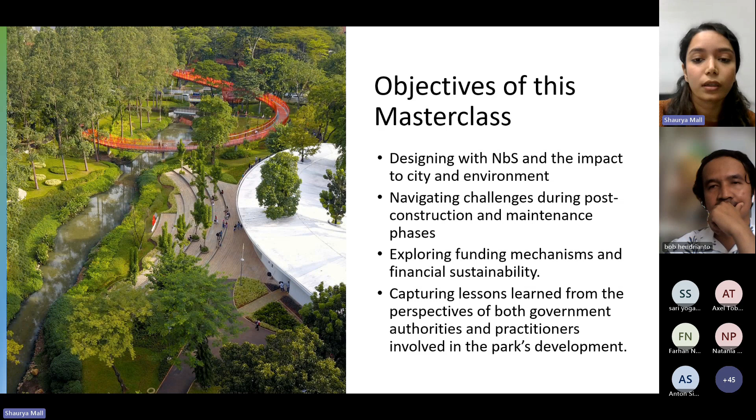Our speakers today will be sharing lessons learned from the perspectives of both the government authority and through the lens of the practitioner involved in the first hand implementation of the project.

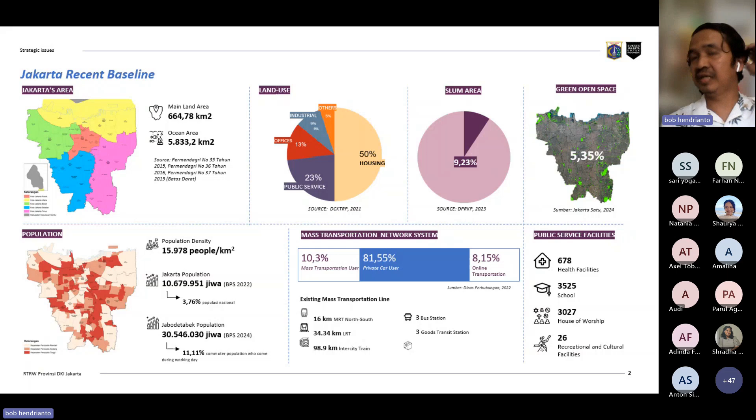Sadly, Jakarta still has a slum area, the number is 9.23%. Green open space is still a small number at 5.35%, which is still far below the requirement, because every city in Jakarta is required to have 30% green open space, compared with Seoul which already has 28%.

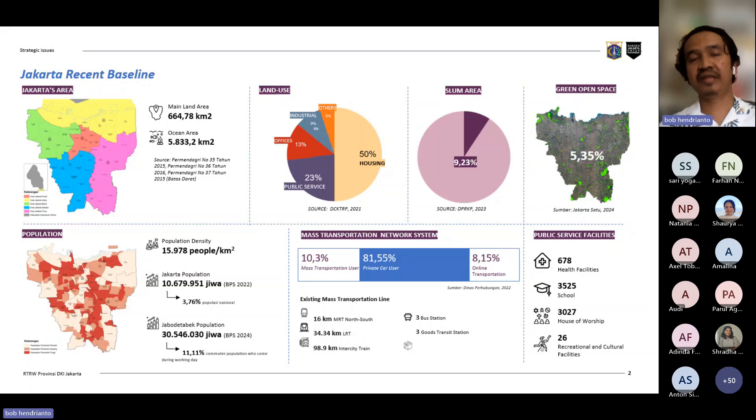Mass transportation user numbers are still small, at 10.3%, because mostly Jakarta citizens still use private cars, at 81.55%. The mass transportation lines consist of MRT, LRT, and BRT, but Jakarta is in progress to develop these lines. Clean water pipe coverage is 65% of Jakarta area, the rest of the area uses groundwater.

We also have annual flooding issues, with 200 to 300 neighborhood units affected by flood per year. Almost half of Jakarta is below sea level, because of firstly, globally rising sea level, and secondly, land subsidence. Land subsidence is caused by, first, active tectonic process, and secondly, over exploitation of groundwater. And Jakarta has poor air quality. These are our problems now.

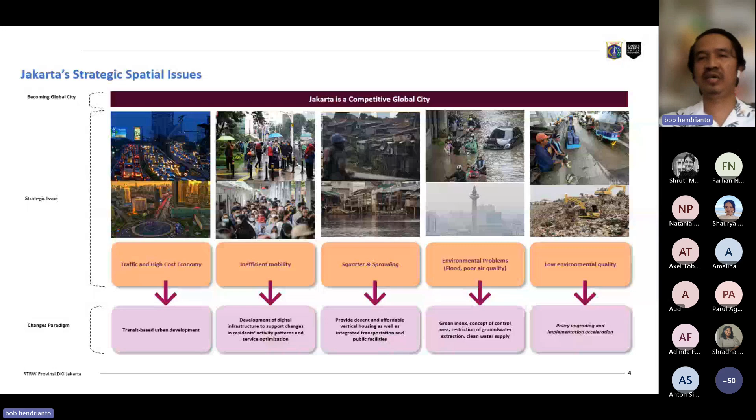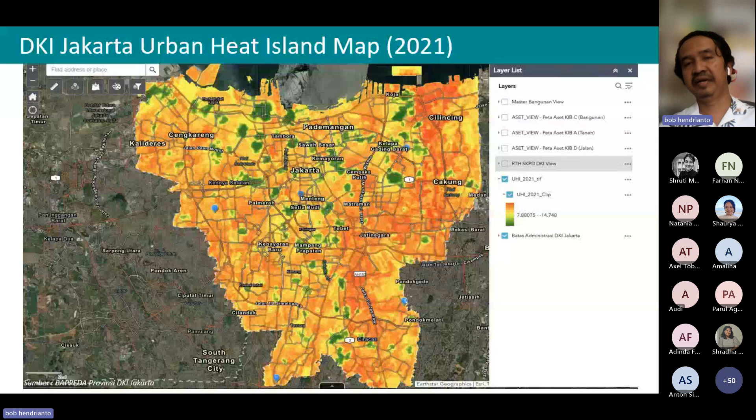Jakarta is a global city, but we have some strategic issues: traffic and high cost economy, inefficient mobility, squatter and sprawling, environmental problems, and low environmental quality. The urban heat island map shows yellow to orange colors covering our province. Globally, temperature has increased 0.9 degrees Celsius in the past 100 years, but Jakarta has already increased 1 degree Celsius.

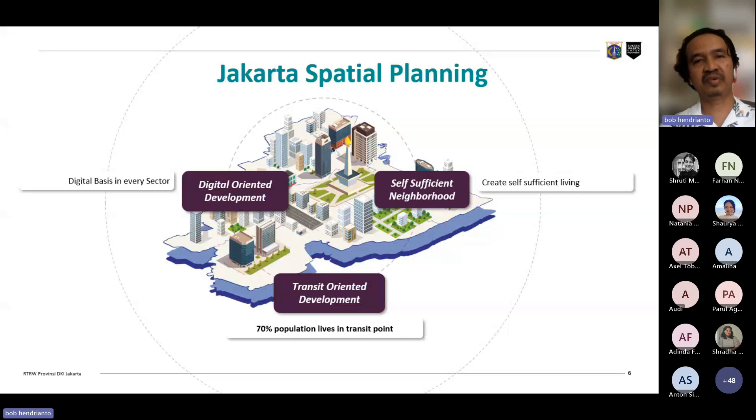This is our problematic issue, so we are taking action to reform our city planning. Now we focus on digital oriented development, self-sufficient neighborhood, and transit-oriented development. We have a target in 2045: 70% of population lives in a transit point. Our government mission is to regenerate a resilient and sustainable city.

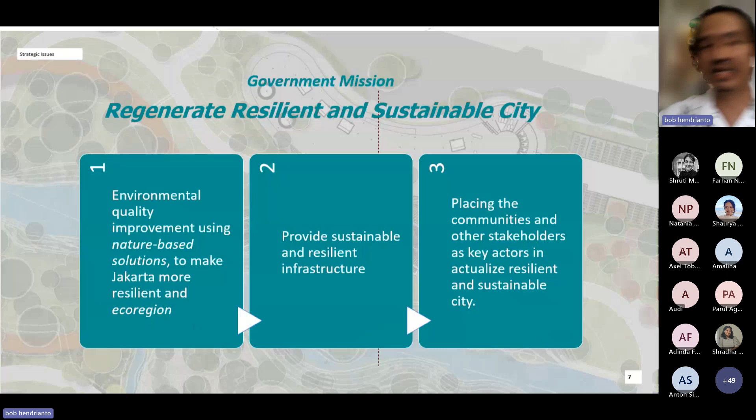There are some important things. First, environmental quality improvement using nature-based solutions, as our topic today, provides sustainable and resilient infrastructure, and places communities and other stakeholders as collaborators, not dominators, as key actors. Then infrastructure development through collaboration between government and private sector as creative financing to build public infrastructure assets.

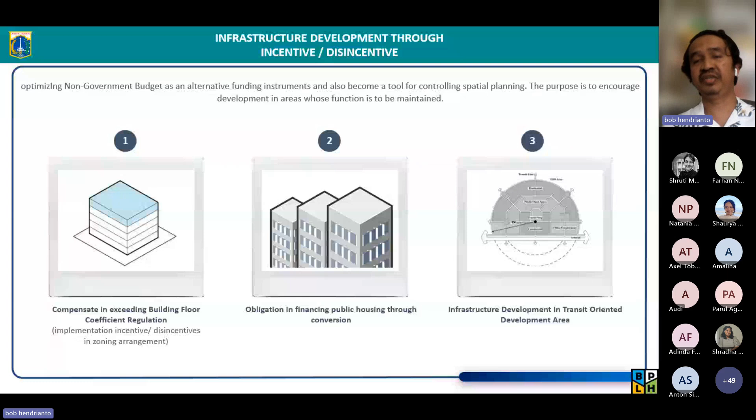We have some alternative funding. One of them is the incentive and disincentive scheme. First, compensation in exceeding building floor coefficient regulation. Secondly, obligation in financing public housing through conversion. And lastly, infrastructure development in TOD, transit-oriented development.

This is a simulation. One option is compensation from exceeding floor level. We made a policy about the legal basis, and then the simulation. For example, from 5 stories, it can increase to 8 stories. The gap from exceeding floor level, we compensate as public infrastructure asset.

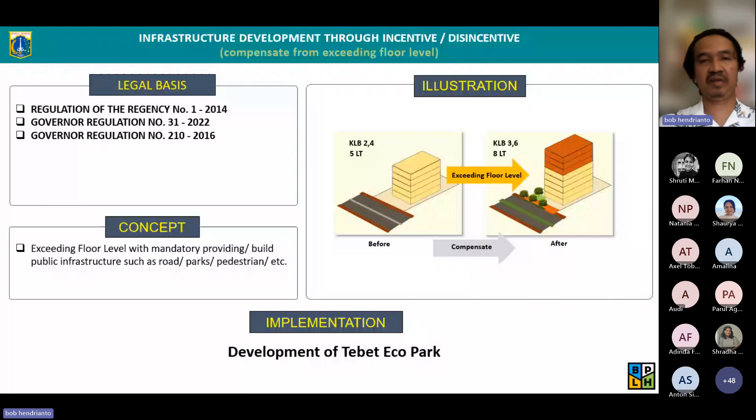We did it at Tebet Eco Park already. Tebet Eco Park - what did government want? Tebet Park revitalization has some key indicators. First, natural river environment and environmental improvement, inclusive visitor access, connectivity between North and South Park because this side was divided by road, and then community activation.

The Eco Park concept is connecting. We have a vision of connecting people with nature. The focus is on nature-based solutions. And then Bishan Park serves as a benchmark for the Eco Park.

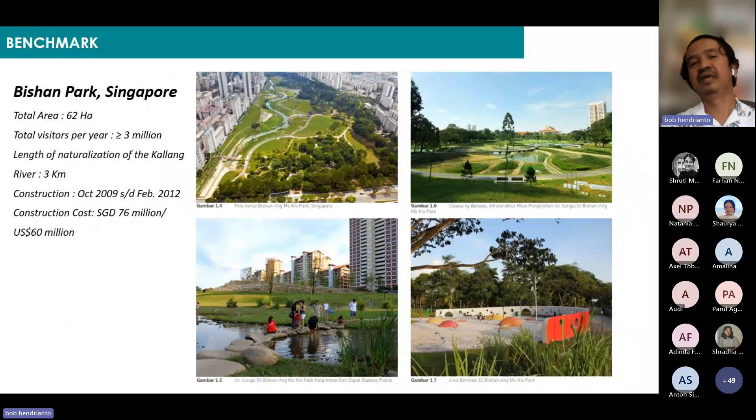I still remember when I communicated with Anton to invite our leaders and our agency to visit some strategic projects in Singapore. Anton guided our leaders and agency to visit Bishan Park, Jurong Park, and so on - strategic projects in Singapore very close in context to Tebet Eco Park.

For mechanisms, Tebet Eco Park used 2 schemes. First, conversion of obligation in public housing scheme - the private companies were PT Award Global Infinity and PT Perkasa Internusa Mandiri. Secondly, compensation in exceeding building floor coefficient regulation - this is the name of that company.

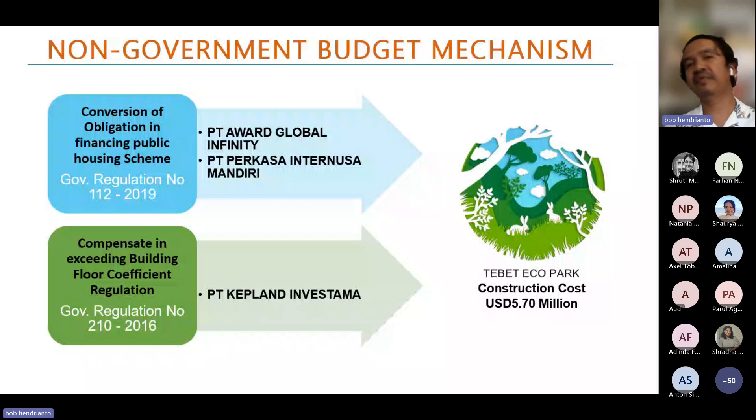Construction cost was about $5.7 million US. Construction time was very short because we just had 7 months for planning and then starting construction. This project took 1 year for completion, and then opened to the public in April 2022.

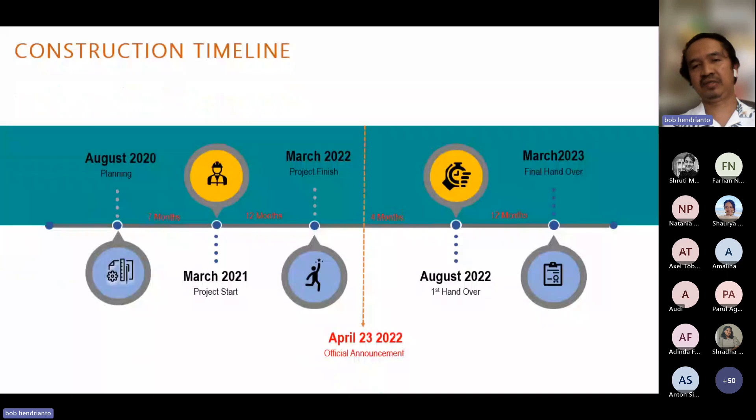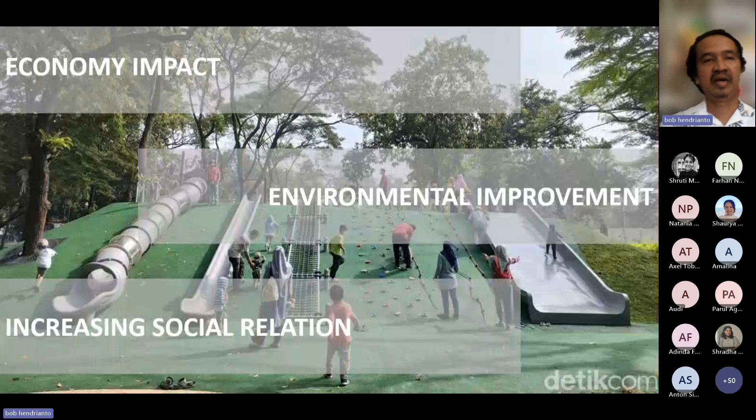Tebet Eco Park is one of our pilot projects for land value capture because it generates economic impact, not just for the Tebet Eco Park neighborhood, but also for Jakarta generally. Secondly, environmental improvement - we invited biodiversity and increased flood storage capacity. And then social cohesion between our citizens.

When you have networks, you will have the community. The community has people, so the community makes Tebet Eco Park more livable and sustainable. And then the magic can happen - you can see that Tebet Eco Park now gets a lot of awards from other countries.

Our community activities include observers, dog walkers, pet lovers, bird watchers, and so on. There's one sample product of collaboration between the Ayo ke Taman community and the Jakarta Transport Discussion Forum to provide a public transportation map and guide for how visitors can get to the park in Jakarta using public transportation.

And then accelerating transformation through redefining Jakarta's city response to pandemic issues, and lessons learned from the Eco Park: change of activity pattern, change of mobility pattern, change of interaction pattern, and accelerating digitalization. Now Jakarta has a one-stop platform so citizens can report regarding public service quality, and government will respond as soon as possible.

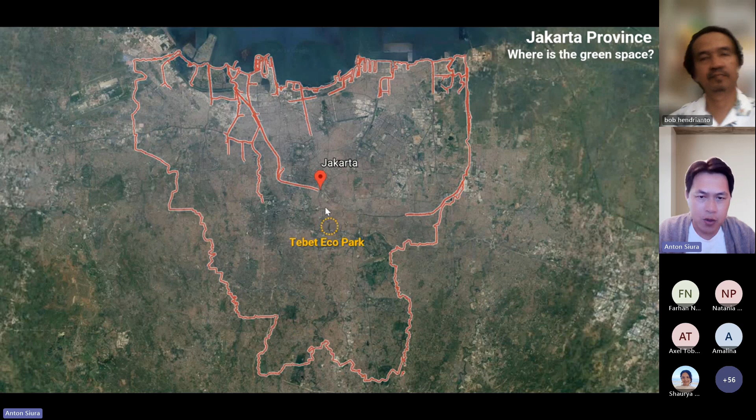If we zoom in, Tebet Eco Park is located right in the middle of Jakarta, surrounded by a very dense residential neighborhood, with a size of 7.3 hectares, or 73,000 square meters. It's been there for many decades, and the place is designated as a Forest City Park, so this area cannot be redeveloped by the private sector into anything else. It has to be kept as a park.

As context, the existing park has a lot of mature trees, and it's divided by two roads and flanked by, surrounded by perimeter roads with a lot of residential area. This was my first time visiting the park, in November 2019, when I was shown the park.

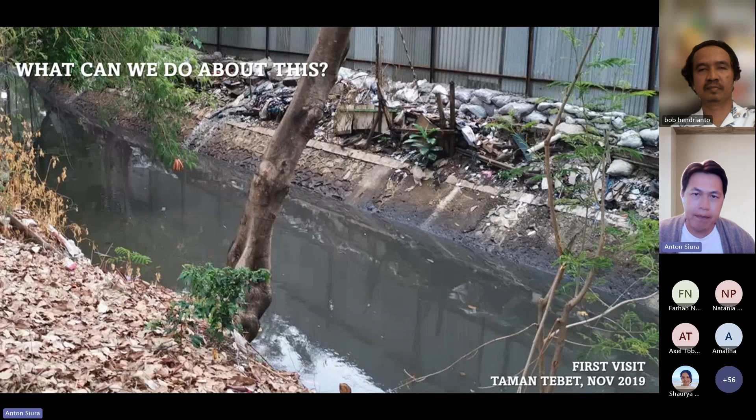What can we do about this? What we saw was very dirty canals with a lot of mosquitoes - it used to be a dumping site for garbage. People were still using the park for jogging, but in terms of circulation they had a lot of problems.

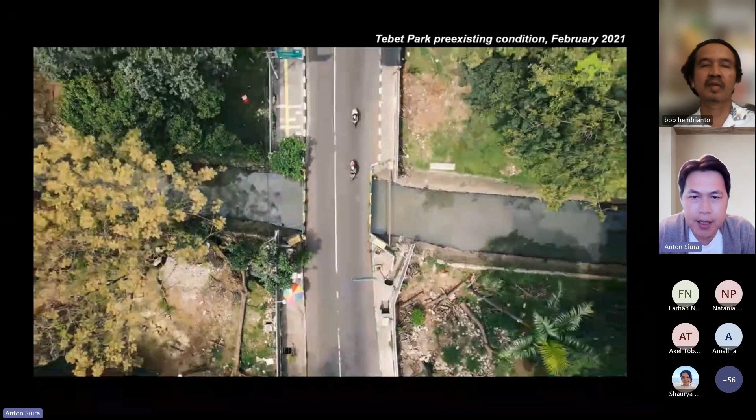So when we saw the park, this was the pre-construction time when we came to the site again. The park had been there and needed to be upgraded, as Pak Bob said. The government gave a very strong guideline: beautify the canals, activate the community space, bring in more energy into the park, and retain the trees as much as possible.

As you can see, the park has been here for many decades and the trees are mature. I believe this kind of park exists in many other big developing cities - in India, Jakarta, or many big cities - a similar park that has been there, used by the community. The question is how can we unlock the potential to make it into a more functional park, regenerating the park to be useful not just for humans but also for biodiversity.

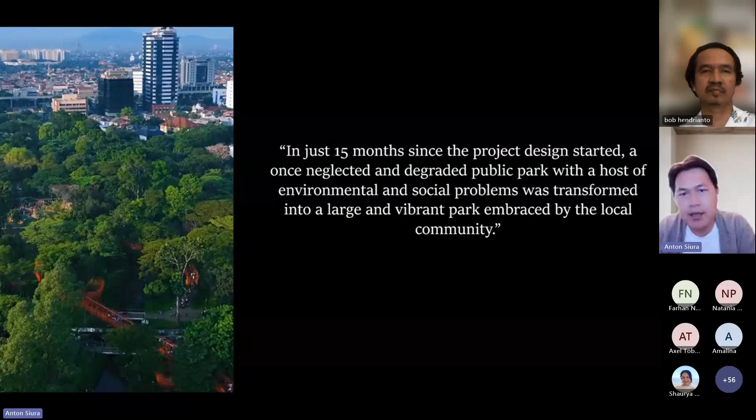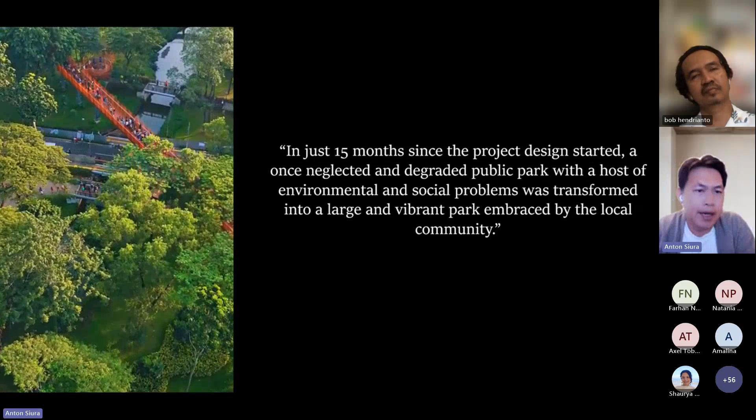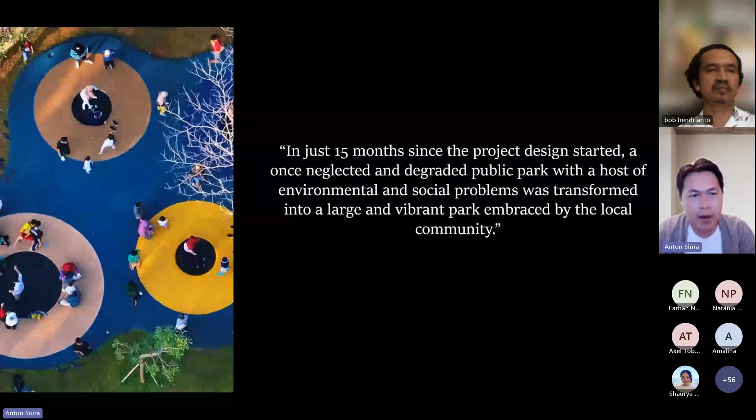They need a public space - a good public space they can use for facilities and other things, because it's been there for many decades. So the question is, in just 15 months since the project design inception, with a very short 8-month construction period, we were able to transform that degraded park into something very vibrant and embraced not just by the local community, but the entire Indonesia. This park can be used as a benchmark example of how we can create more parks like this - resilient, with more social inclusivity space for children, elderly, and many other users.

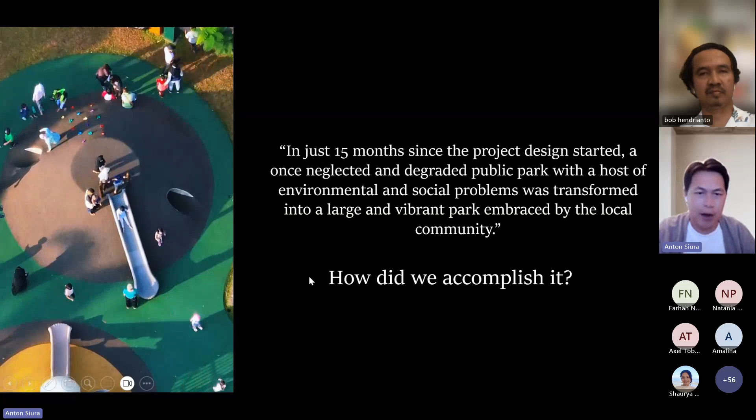How did we accomplish this? I'm going to share the philosophy, design, the construction process, and what is the impact at the moment.

As you can see, the park captures the stormwater catchment of about 3.67 square kilometers coming through the south of Jakarta and many residential neighborhoods, flowing into these 6-meter canals. This canal is connected to the Sungai Ciliwung, the big river.

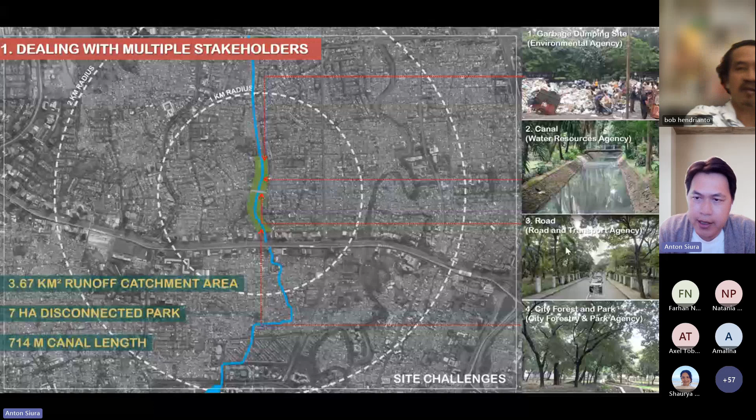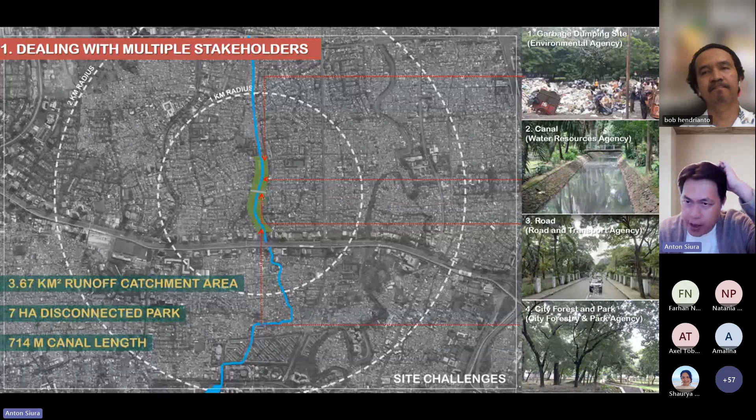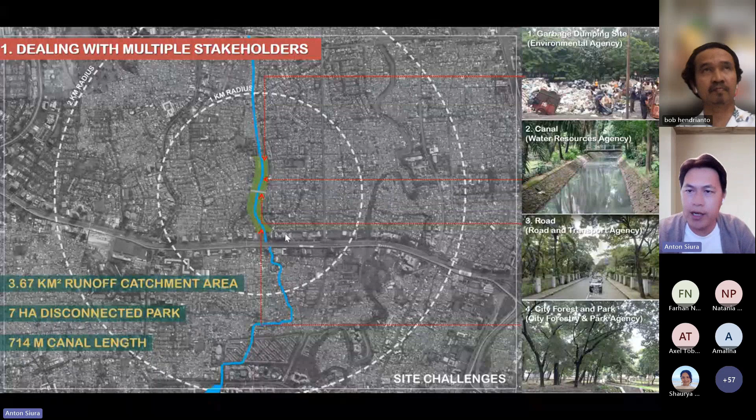We have 4 problems. The first is the garbage dumping site. The second is that the canal is a straight canal with a lot of pollutants, and roads separating the 2 parks. We also have a city forest park with a lot of trees maintained by the forestry department. So we deal with 4 agencies: road and transport, water resource agency, environmental agency, city forestry park, and this required very strong coordination and communication between many stakeholders that maintain the parks.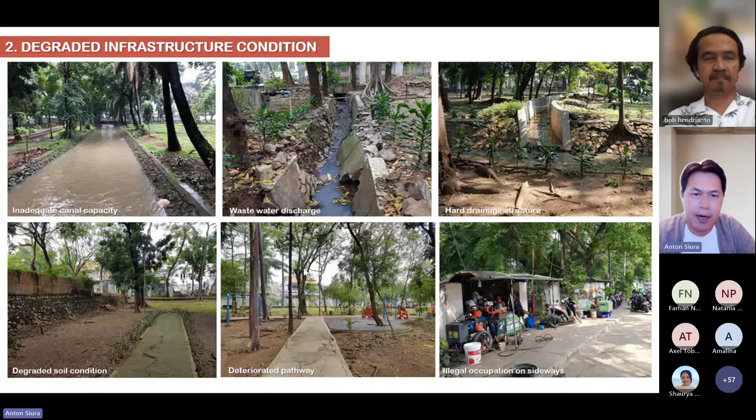This is how it looks like. We have an inadequate canal capacity. Wastewater discharge from the kitchen, from the toilets surrounding, comes into the canal directly. There's a lot of gray infrastructure made of concrete that trespasses the park. Soil condition has been degraded, pathways, and we have a problem with illegal occupation on the sideways of the parks. When we were doing the construction, within just 3-4 hours of big rain, the park is easily flooded.

This shows that the capacity to retain and detain the water is not big enough currently. Then the first thing we want to tackle is the hydrology design. We have to research the capacity before the construction, what is the original concrete canal, and what is the detention area in a 25-year storm event.

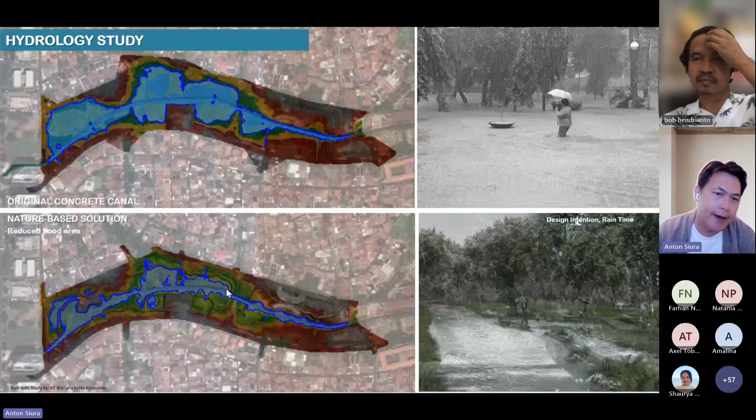We did a simulation. If we do a nature-based solution, changing the canal into a natural edge, creating more porosity, the data shows that the flooded area can be reduced and dedicated to a certain zone. That convinced us to work with this approach, a nature-based solution to transform the canal and the entire project, using as much nature element as possible.

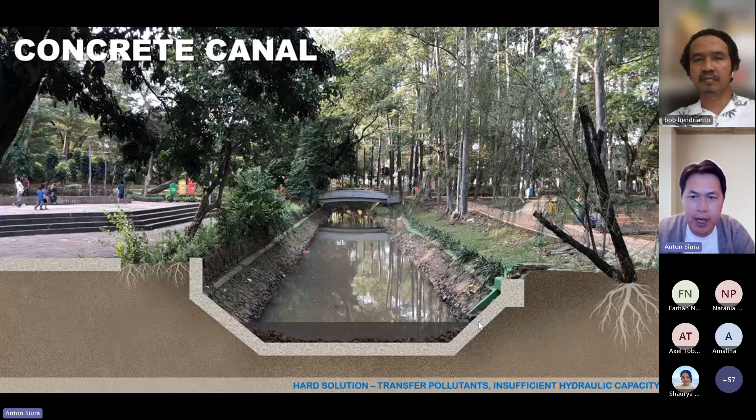So this is the cross section. How does it look like? I think this is a typical canal built many years ago, using stone, rubble, and concrete. During rain, the water will flood the landscape area.

We propose this kind of soil bioengineering technique, using different techniques depending on the area. We try to maintain the trees as much as possible, increase access, create riparian planting, plant a lot of vegetation, and use stone and riprap for edging. By doing that, as shown in the graphic before, we can retain the water within the designated area.

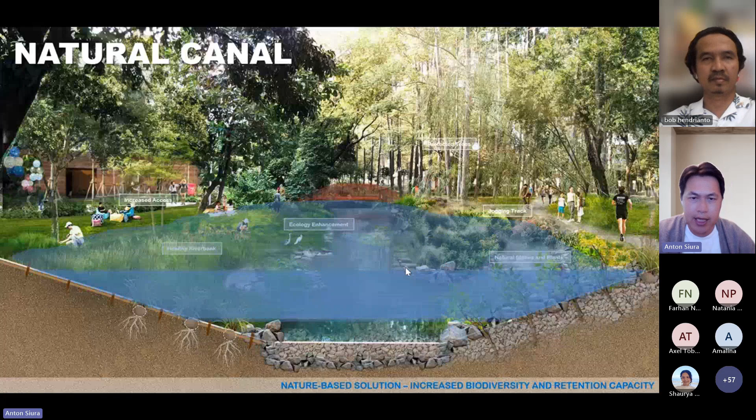This is the transformation from the canal that separated the 2 parks, avoided by people due to insufficient hydraulic capacity, transformed into better hydraulic performance, while at the same time creating a lot of life, attracting more biodiversity, while still maintaining most of the trees and creating a lot of public and social space around the parks.

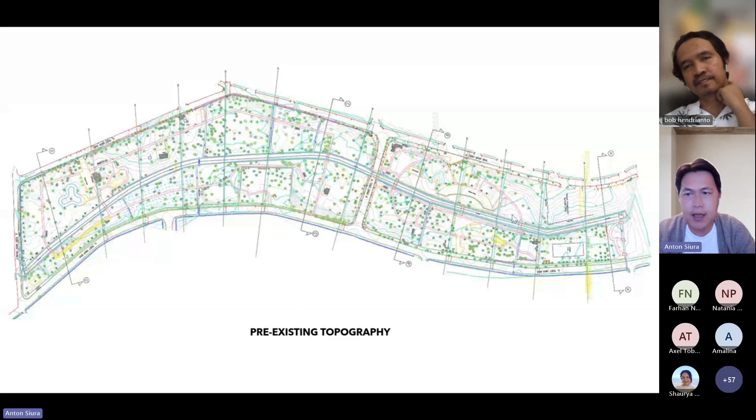This is the existing topography before the construction. We have this canal that is straight, going very fast to the north, and when it's not enough, it gets flooded.

So what we create is maintaining the line but creating more meandering, bringing in more water, creating more detention space along the canals, stop points, slowing down and detaining before discharging to the northern side. Then we activate the programs, the community programs, along this blue spine.

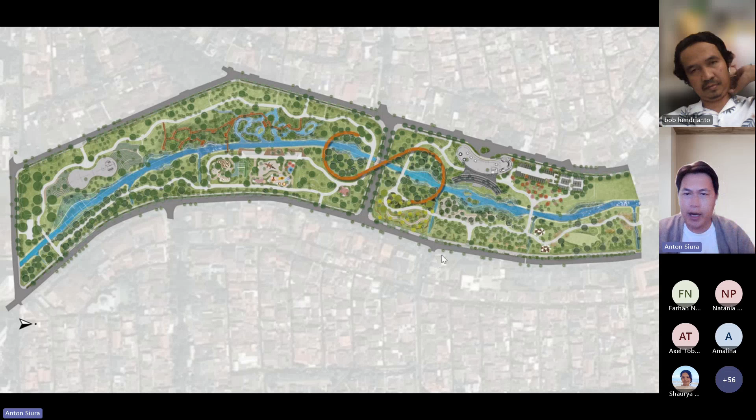We create programs that fit the landscape context, and we also connect the separated park with a meandering bridge that brings a unique identity to the park, as well as a smooth walking experience from one part to the other, designed for barrier-free accessibility, so people can jog around the park seamlessly—100 rounds, 10 rounds, or 1 round within the park.

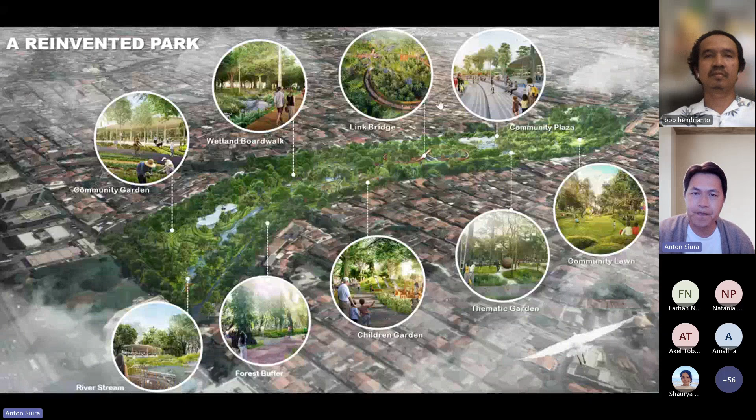It's really about integrating hydrology design, ecological design, and creating a social program within the parks. The idea is really changing this gray, flooded land and transforming it into blue-green open space, creating more space for people to walk into nature.

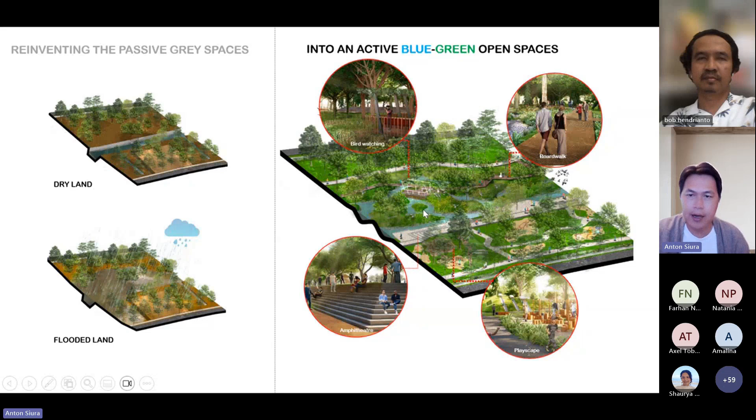A lot of activity space embedded into the park, right?

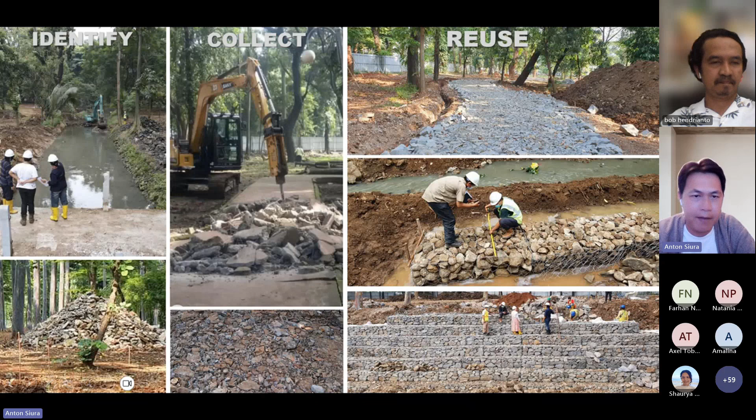In terms of construction method, this was done during the COVID pandemic, where restriction of movement and transportation of material is difficult. So we decided whatever we took from the site, whatever we removed, we reuse those materials as part of the construction, using it as river embankment, gabion wall, and hard pavement. So what we take out, we use back. That cut a lot of transportation costs and also reduced carbon emissions.

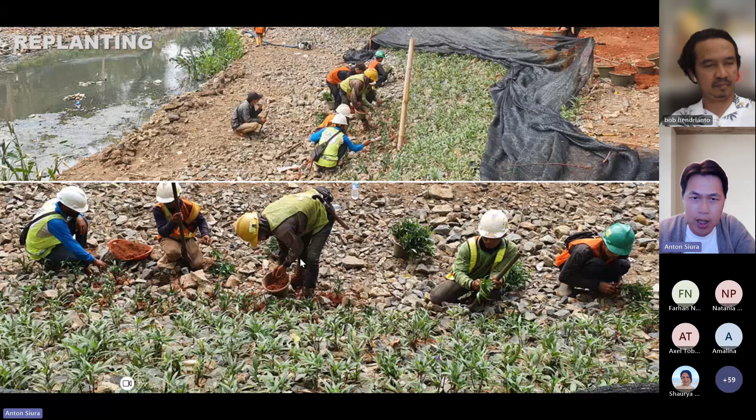As you can see, the transformation is we broke down the concrete and stone and reused it with planted riparian plants. These plants will strengthen the erosion and make the stabilization of the environment stronger and more natural. As an example, this is how it looks like with a lot of trees with a lot of hard concrete around it. We break down the concrete.

This is the image of the construction. We create an island around the trees and create a lot of contact with the wetland, and then we plant a lot of plants along the wetland, with a boardwalk above it, as much as possible not touching the ground. This space allowed for the water to increase up to the platform level. So transforming these gray infrastructures into the blue-green, meandering landscape creates more life and enriches the biodiversity of the site.

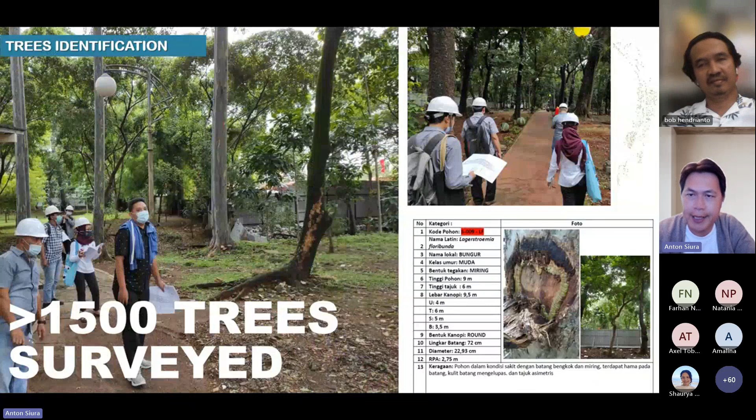The trees are surveyed. It's important to survey all the trees because we need to work with the surrounding, not just cut the trees. So those trees that are good, we keep. Those trees that are damaged or decayed, we transform and reuse as part of the construction material or features. For example, the building gives way to the trees. So 100% of the material affected the existing trees, whether it's transplanted or reused as part of the construction.

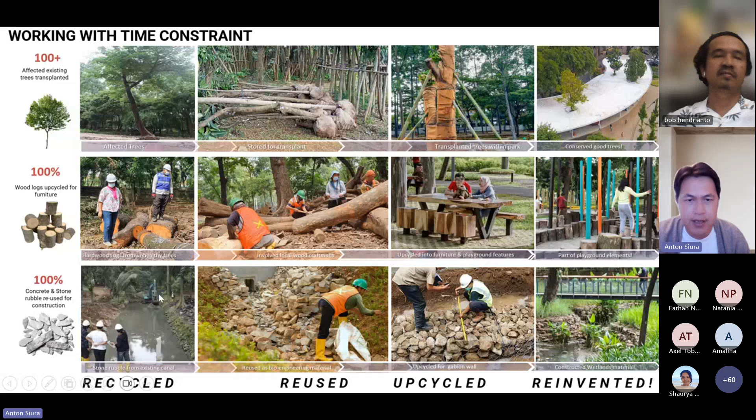So the furniture is made from the trees that were on the site, so there's a connectivity between the past and the future. And this also, the stone, rubble, and concrete, everything is reused.

It was opened on 23rd April 2022, almost 3 years ago. And I think until now it's still being talked about as an example of parks integrating nature-based solutions. It was opened by the former governor, Anies Baswedan. As you can see, everyone's still wearing masks—it was during COVID time.

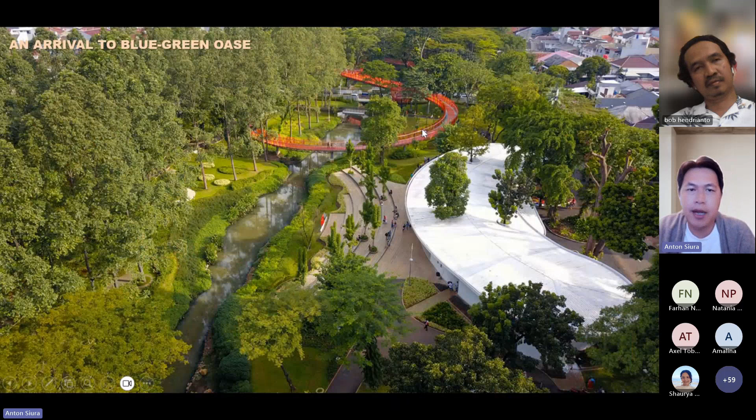So these are images of just when it was completed. It looks like the park has been there for a long time because we tried to integrate the water and the greeneries as much as possible, using very light construction to connect the two parks. So it looks like the park has been there, and between the pockets of space, we create a lot of space for the

community to do exercise, playground, and so on. So the bridge is immersed between the trees. As you walk along the trees, you don't feel like you're walking on a busy road—that's the power of nature. The trees just become a focal point. And this is the plaza for people's activities.

We have a soft plaza and hard plaza for the community to use. A lot of space is designed to be as light as possible. Even the playground with a simple swing meanders along the existing eucalyptus tree. The playground is also designed to mimic natural animals in the swamp area—we have giant crocodiles integrated into the natural setting of the existing trees. The playground is one of the most popular spaces.

Just next to the playground, we have this cantilevered decking that meanders between the trees, allowing people to look out into the water and the wetland. We want people to feel the connection with the water again, not avoiding it, and allow people to walk along the wetlands. During the rain, the water will be dynamic—it will move up and down depending on the weather.

And we are happy to look at how people want to come to do more exercise walking in the very busy city of Jakarta. At nighttime, Tebet becomes a very nice place to visit as well, and the lights reflect on the trees, making it a popular spot for people to do TikTok videos and this kind of stuff.

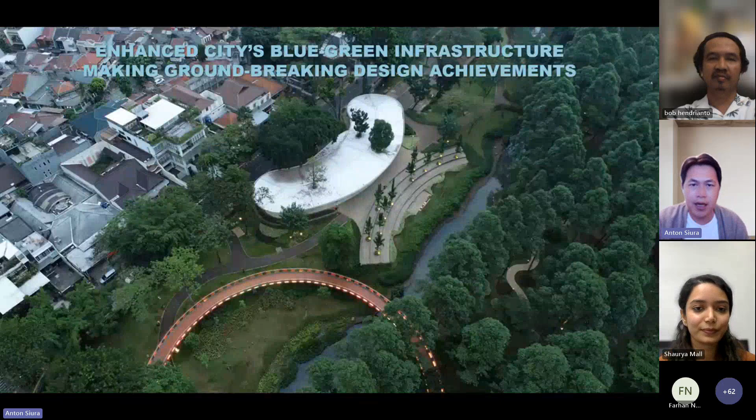And what is the impact? The nature-based solution impact is really about creating a strong groundbreaking design achievement. The park seamlessly integrates landscape architecture and infrastructure engineering into one package. During dry times, it's just a normal canal, but during wet times, it becomes a detention area, a parking space for rainwater before we discharge it elsewhere. This is a short video showing how it was transformed.

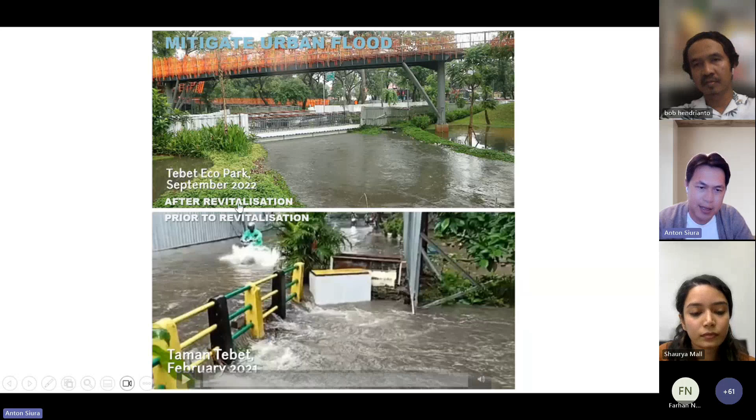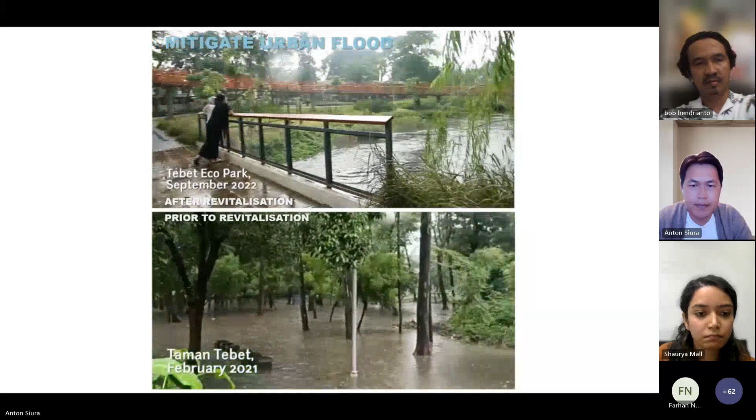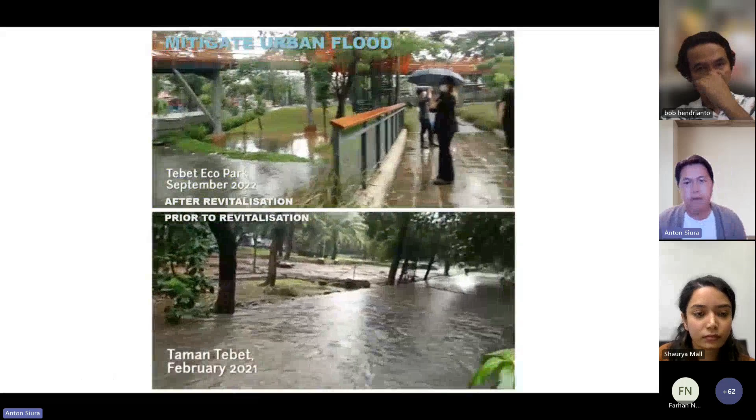The bottom one is before construction. The top one is the same location, same angle, during peak stormwater time. Previously, almost the entire area was flooded with water everywhere, from the street, from the road, and now it's controlled within the floodplain area. This shows how when we give more space for soil, for nature, for vegetation, it creates more porosity. It absorbs the water and slows down the runoff.

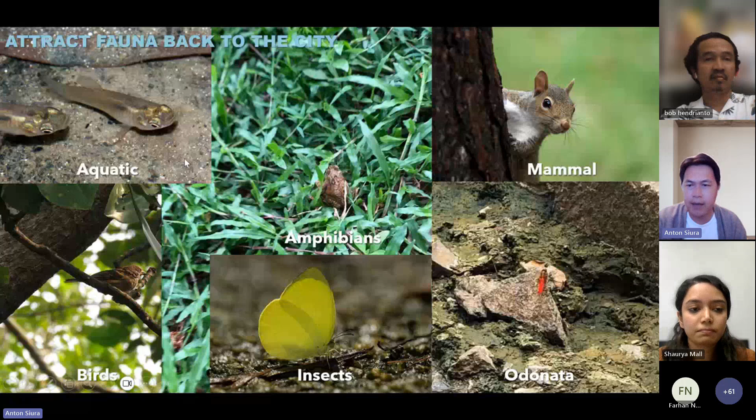It's not just fast flowing water. Beyond that, it's really about integrating plants that can attract biodiversity, such as butterflies, dragonflies, even fish coming into this area. We've also seen less mosquitoes before and after construction. These are some animals that we've spotted, and we hope more animals will come.